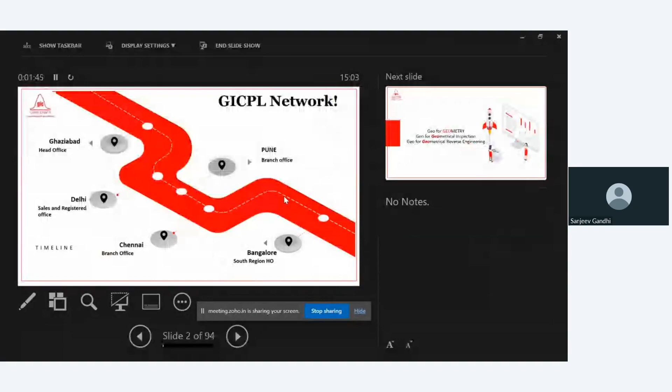As far as our company is concerned, some of you know us very well. We are a GIC India-based company, and the name Geo we have taken directly. We do a lot of stuff with inspection, a lot of things with reverse engineering, and our company is almost now 22 years old. And of course, I'm one of the directors of the company, and we are having now 1995 people serving various product lines.

The most important slide I just want to show you here, and then I will pass on to Alex. When we say Geoinformatics can do measurement, are we able to do the measurements? Unfortunately, no. We are companies which are very, very domain specific, and they help build the solution for our customers. All these names and the domains you are seeing, whether it's a camera-based system, a laser tracker, or a vision system, these are all our strength.

Sorry? Yeah, we cannot hear you clearly. Okay, anyway, I am passing this over to you. Today, we are focusing on Altimet France, which is the surface metrology company. So this is all from my side. I want to invite you to record the screen, and let us start talking about the real subject, which is surface metrology.

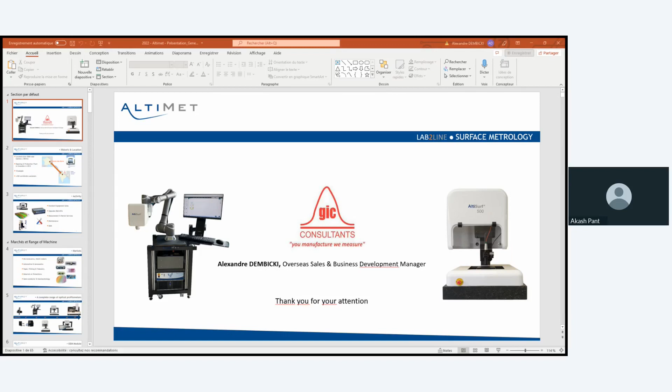How can we answer the needs for surface measurement? It's with a complete range of optical profilometers. As you can see on the slide, there is... Yeah, Alex, I would like to stop you for a second. Are you moving any slides? Because on my screen, I can't see any moving slides. Oh, yeah. And now it's moving, now it's moving.

Which slide are you on now?

You see my screen? Yeah, I can see your screen. And now, do you see all the different machines? Yeah, I can see that. Now it's perfectly moving fine. Okay, so sorry about that.

To answer the needs of the different markets, we have created a wide range of optical profilometers. We can start with a small size OEM module that we can implement into the production lines. The thing is, we use the exact same technology, only the size changes.

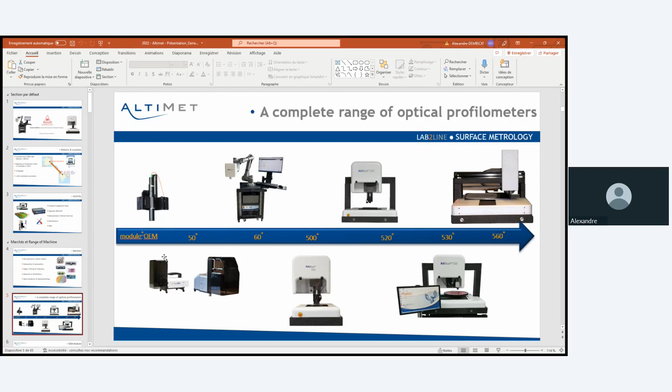So we go from very small to hand portable machines, to machines that we can put inside a cobot or a robot, and then you've got stand-up machines like the 500, 520, 530, 560. The only difference between those machines is the size of measurement of the sample. When it's really small, you can use either a small or a big machine to put many parts on it. Or when you've got really big samples, such as wings of a plane or a car body, you can use the smallest machine implemented into a robot.

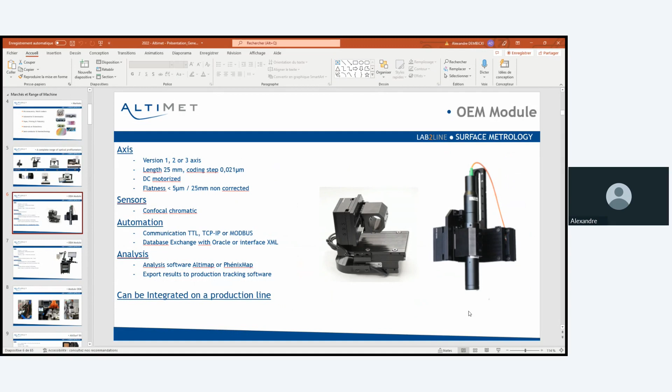So I'll go quickly, but basically you've got 3 axes, X, Y, Z, and we implement our own technology, which is mainly confocal chromatic. We measure the distance between the probe and the surface, and we've got nanometrical Z resolution. That's why we are really precise and accurate on surface measurement, and that's why we are well known in the world. Another example is this smaller machine implementing on a cobot.

Some pictures inside a production line, on a robot, and then on a cobot at different customer sites.

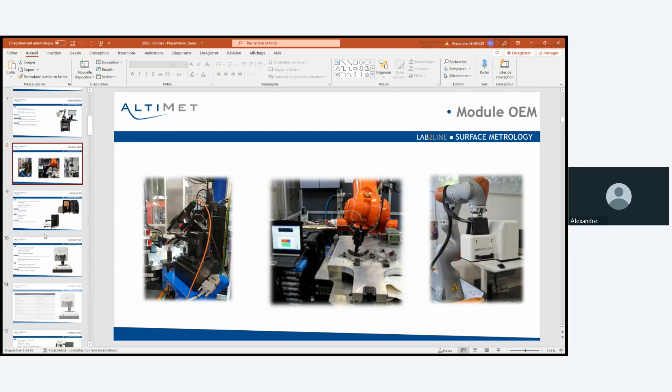Our main equipment is the AltiSurf 500. In 2 weeks, just to mention, we will be delivering this machine. It will be a demo machine for GICPL, and they will have a full range of measurement capability with full sensor, full software, and a camera. So if you've got any samples, you can send them to the team in India, and they can make some measurements.

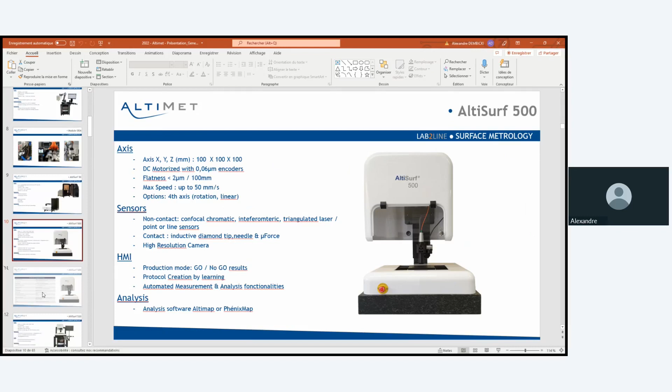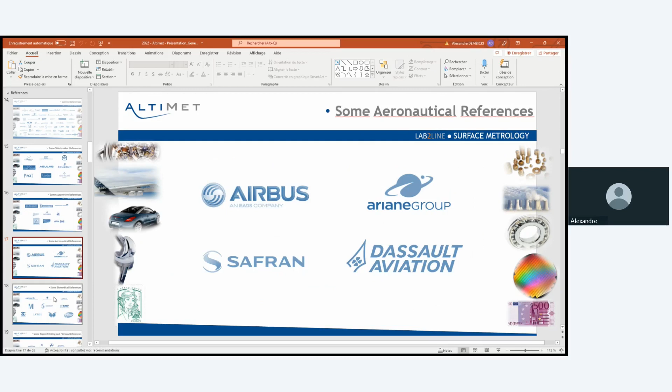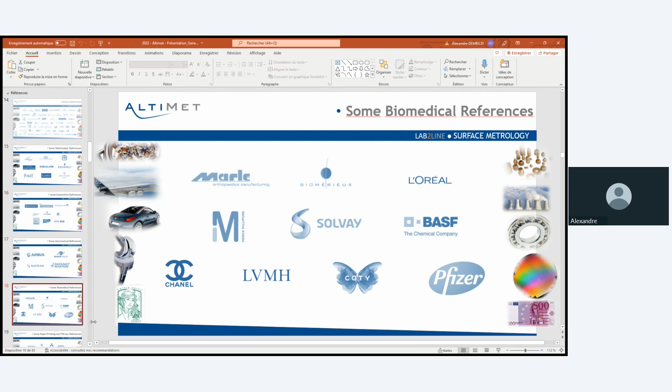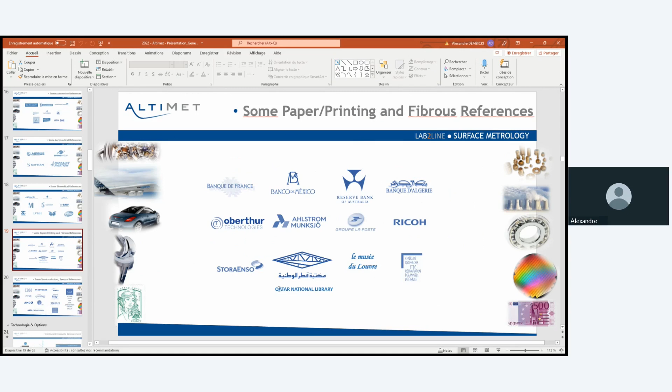In the printing industry, we equip mainly the banks, in order to measure the bills and the varnish on them, the ink, as well as some huge references in museums, like the Qatar National Library or Le Louvre in France.

And finally, for semiconductor, we've got huge implementation mainly in Asia, in Singapore or Malaysia, China, with Fabtronic, UTAC, AMD, Intel.

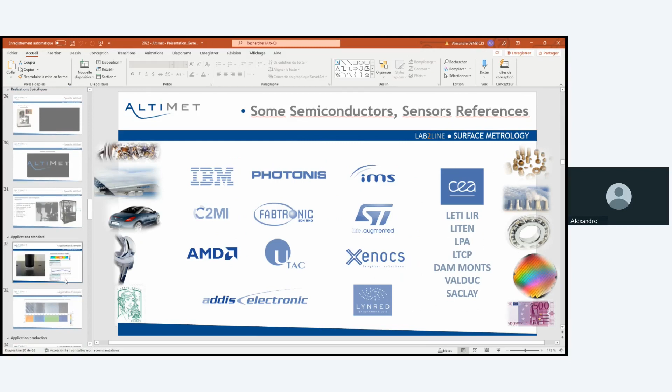So now, what can we really measure? We are most known for roughness measurement. We use the machine and the probe in order to measure different samples.

We do not care about the type of sample because we only need a reflection to be able to do the measurement. Here you can see that we've made many different profiles and we measure the roughness, the RA parameter for the profile, or because of the new ISO 25178 norm for surfaces, we do surface roughness measurement, as you can see here.

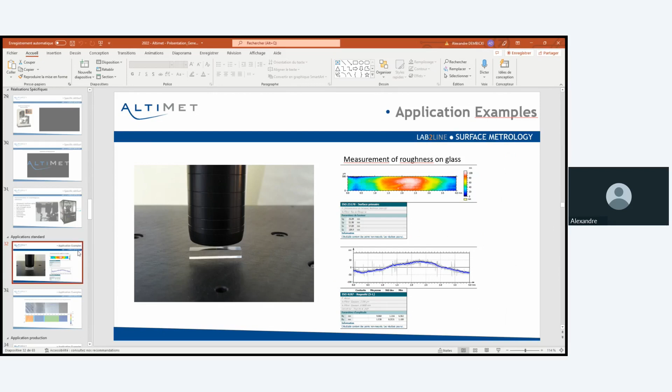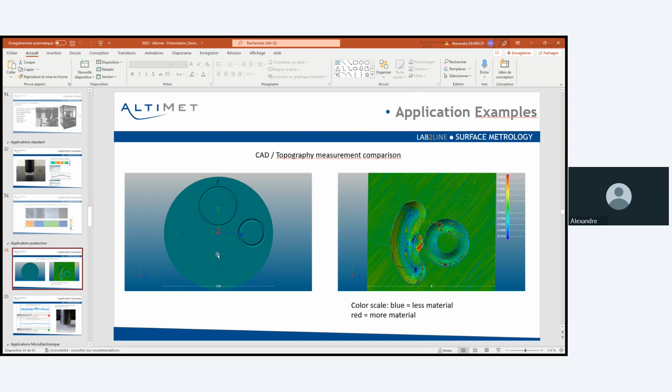So what can Altimet do? Mainly, you've got some CAD and you want to do some comparison. With the Altisurf range of machines, you can perform measurements, and apply it into your CAD to have the deviation of the surface compared to the perfect CAD model.

Then, of course, you want to do some automation. Everything Altimet proposes can be automated, and you can have directly for the operator a red or green light, pass or fail, with an automated report that you can print.

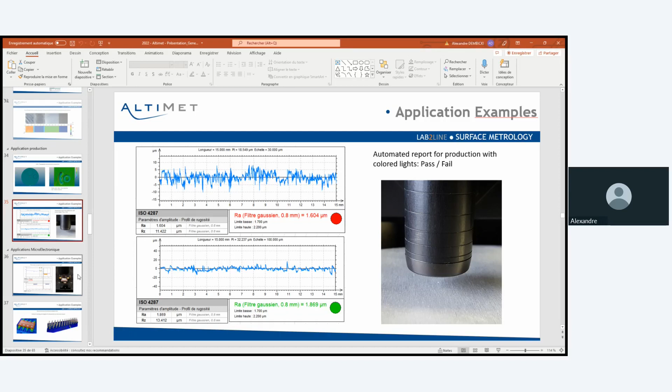Okay, so this is good, but what kind of sample can we measure? We can measure all of them. In microelectronics, we can do electronic component measurements, and for example on this one, this is the bump and the different step heights. You can see we can really go down in nanometrical range or in millimeter range, approximately down to 2 nanometers in Z resolution, up to 25 millimeters.

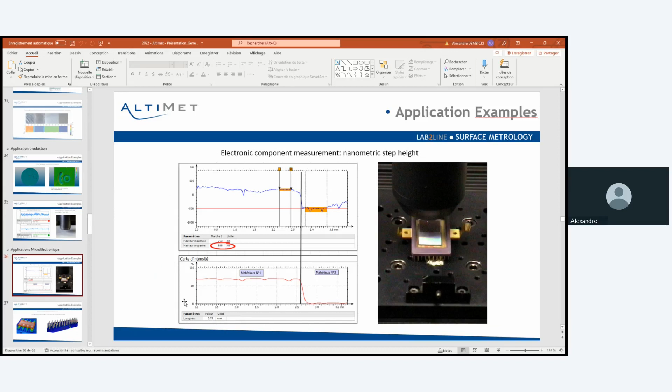It only depends on the probe that we use. For example, on this other electronic component, we can study the welding of the components, the height, and even the roughness on the whole surface.

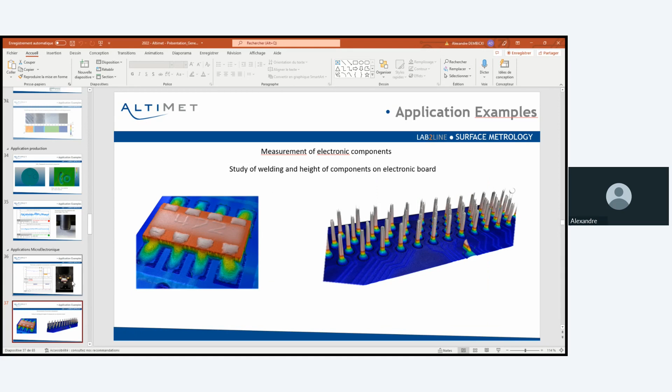For the wafer, you can see that we've got a camera and our own sensor. We've got some options of visualization of the sample that we can rotate. Then we can do some pictures and dimensional measurement of the laser or plasma dicing.

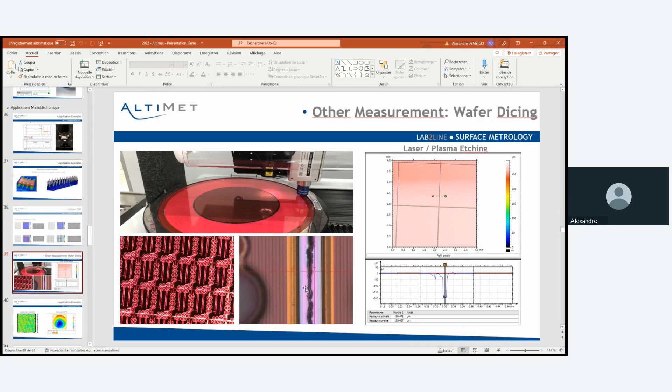So this is just using the edge. And then we can compare it, as shown in the presentation, the width or the altitude of this crack. And we can match it, the measurement, with the picture, or even with the CAD model I mentioned earlier.

So this is another example of diamond disc. This is in order to see if the diamond disc is used or not. Has it some wear? How long can we use it? And we can also do TTV measurements, so thickness measurements.

So there are 2 ways of doing that. Either we use only one probe that does the measurement with a different technology, or we can have also 2 probes measuring upside down.

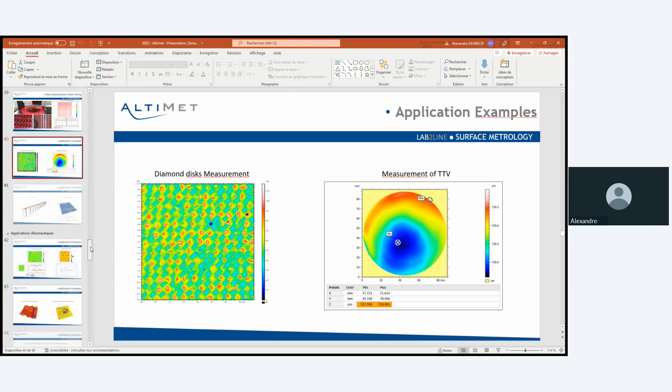For the aeronautical application, mainly we do some crack measurement on turbine blades, for example, so we can really understand what's going on within the material that we use, and also the wear measurement.

Everything that I talk about at the moment is also being applied in automotive or mechanical industry. As seen in the wear measurement, we use a step height measurement for the width, and the height here is around 33 nanometers. So we are really accurate and really precise.

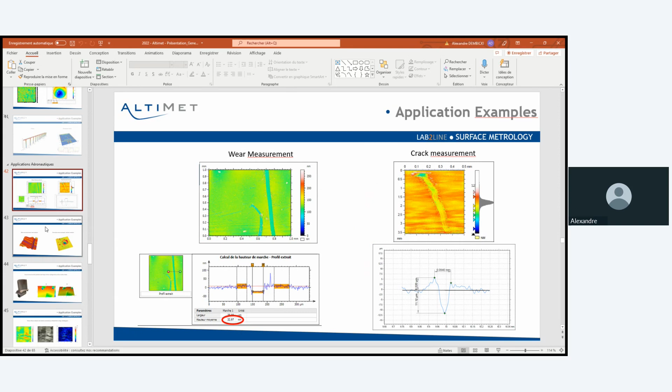Another example of wear measurement, but this time in 3D, and of course a corrosion measurement with a volume analysis.

So how is this hole? What is its diameter, the radius, where is the center, what's the altitude or the depth of the hole? And so with all this knowledge, we can compute the volume, and we can then understand how the corrosion is being made and how it's increasing within the sample.

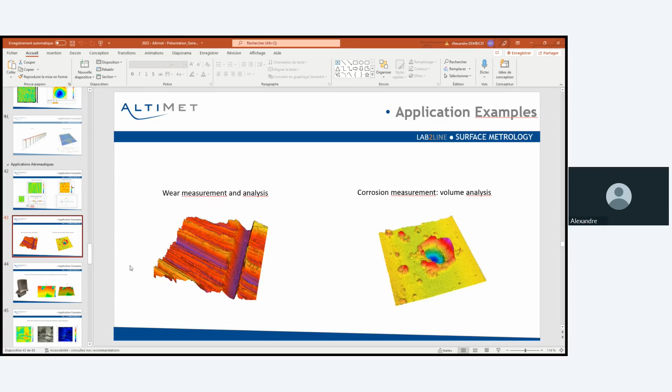Here you've got the measurement in 2D and in 3D. I'm sorry I cannot show you all the different measurements because this is really confidential. My customer could only allow me to show you this slide.

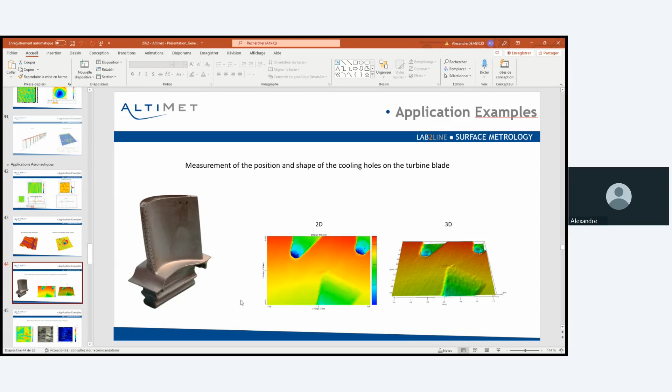Then this is another example on this blade of the failure facies. So you can see different colors depending, so different altitude, and you can see how it behaves within the sample. So this is for the wing or the landing gear.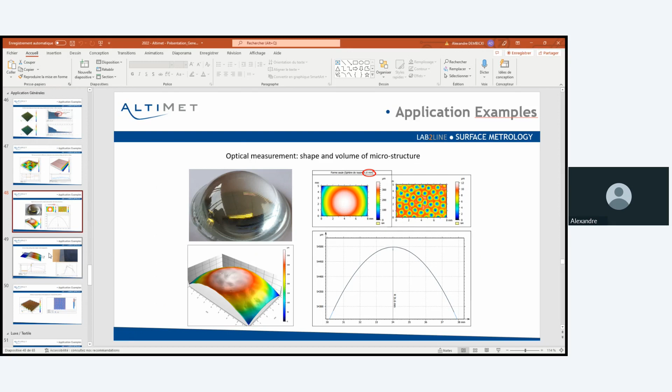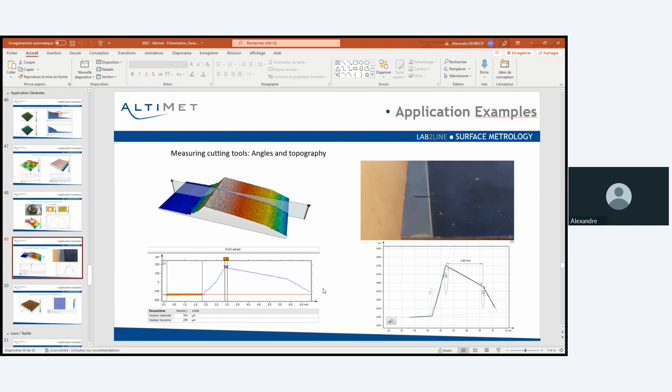So this is for the form and shape. Here, this is a cutting tool in order to understand how long you can use it in the milling machine, like the drill. Can you use it properly? What are the different angles? Will it behave properly on the metal I drilled into?

Volume measurements, once again, everything that I show you here is made automatically. We've got a really powerful software to understand the different volumes, and it can count also the number of holes, let's say the blue holes. And we can also make some statistics behind that we can share into your different programs.

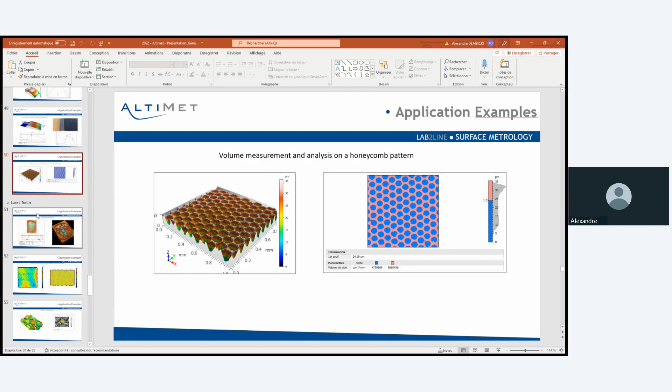This is for luxury and textile. You can have some engraving measurements, always the same, measuring the roughness, measuring the width, the depth of the different engravings.

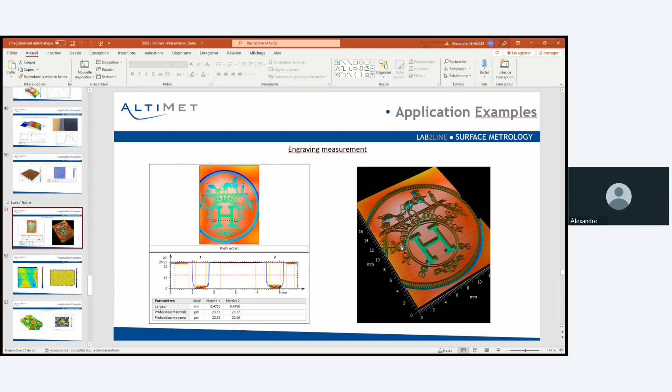We can also do this for automotive, for the inside of the car, using tissue or leather, and you want to compare the differences. So why choose one over the other? You just make one measurement from sample A and sample B, and you can clearly see the differences in topography. With this measurement, you can do lots more analysis like roughness, step height, number of holes, and this gives you the aspect and gloss of your different materials. So it's easier to choose the best one for your needs.

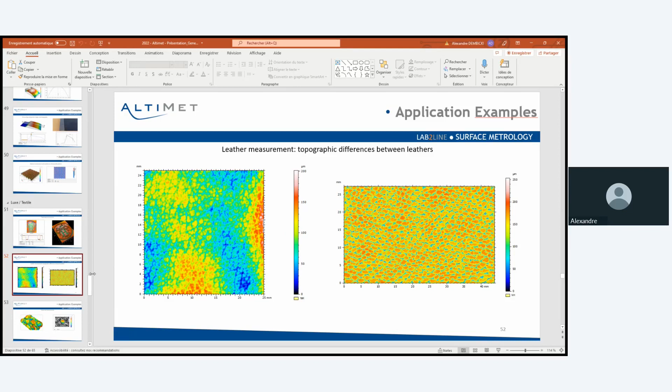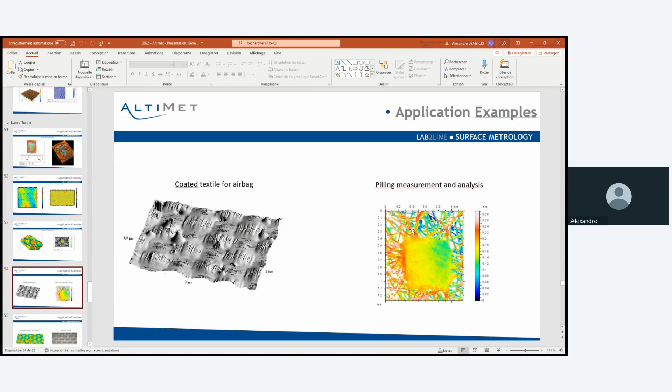We also do some snake skin measurements, coated textile for airbags. Is the airbag going to be good or bad? Will it hurt or harm people when it's used? Is the coating really good on this? Same as pilling measurement and analysis. You can see all the different fibers of the textile, and here there's a huge amount of it, so it's not good for the end user customer.

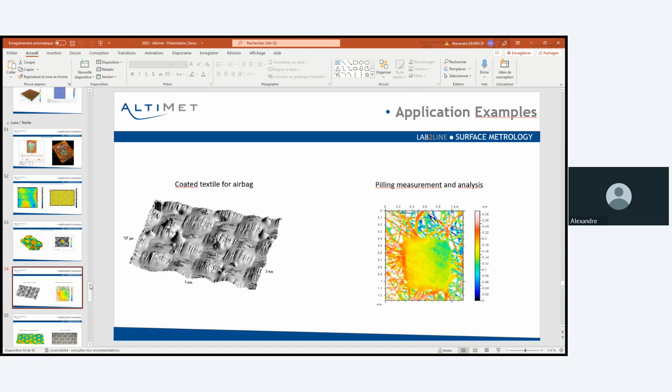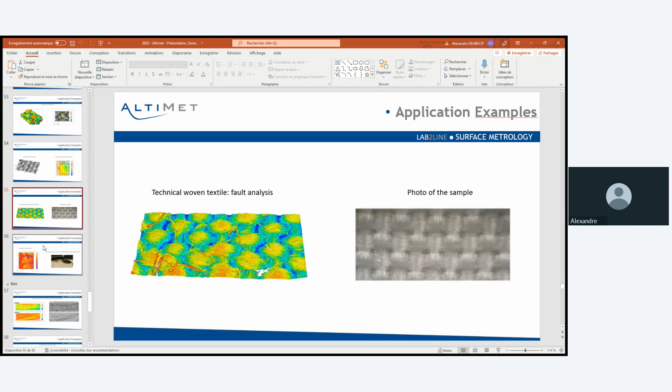A nice other application is paper measurement, and here we've got an example of a 16th century Chinese fibrous paper, as well as a banknote measurement.

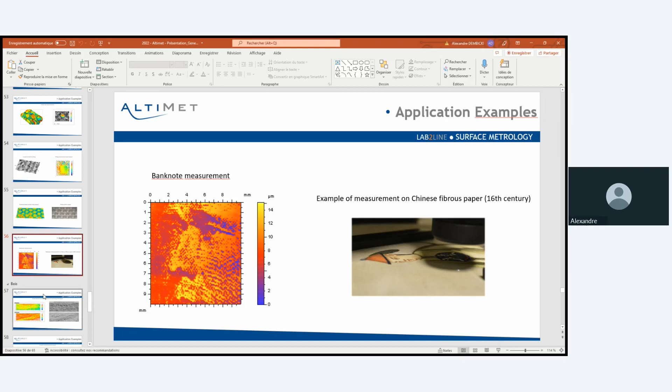Then for wood, because as I said earlier, surfaces cover everything, and we measure surfaces, we can measure everything. We can have an understanding of how the varnish behaves, what its thickness is. Here's an example of water varnish with its picture compared to a solvent varnish. You've got the same scale of measurement, so the comparison is really easy to make, and you can really tell that here you've got some holes or some dust, and you have to decide, is it good or bad, depending on the plans you're trying to make.

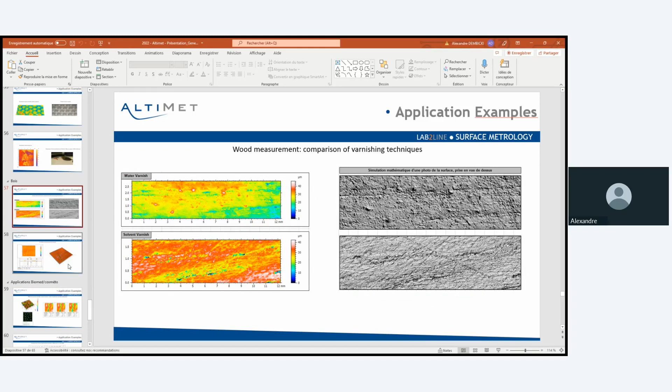Of course, on metal and on wood, you can have some scratch measurement. In this example, it's on wood. Here you've got the step height, number 1, 2. You compare it - is it good enough? Can I clean it? Will it be easy to clean it? How come I've got a scratch here? How can I change the parameters in my production line to not have those kinds of scratches?

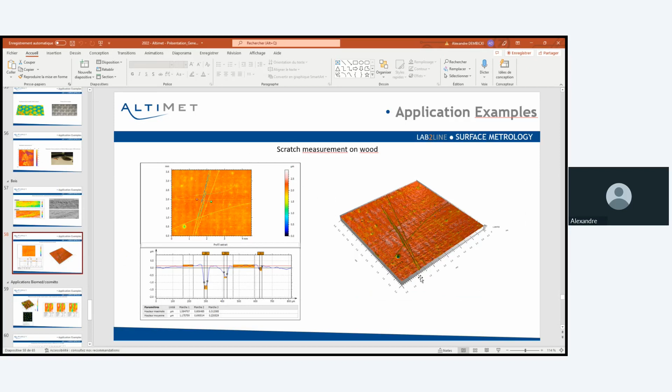Finally, we go into cosmetology. We measure the human skin. You can see all the different wrinkles and veins. You can understand how they are connected to one another.

But mainly, what's more important is that you can apply some anti-wrinkle cream, and you can see over time how it's behaving. So in this one, it was the first measurement, the second one, and the third one - at time 0, then at plus 1 hour and plus 2 hours.

Here you see a deep valley. It shrinkens and it shrinkens again. So that means there's a good effect for the cream, because the valley, the wrinkle, is decreasing. So the altitude between the highest and lowest point is minimal. The depth was 235 micrometers, and it goes to 110 micrometers, so 110.

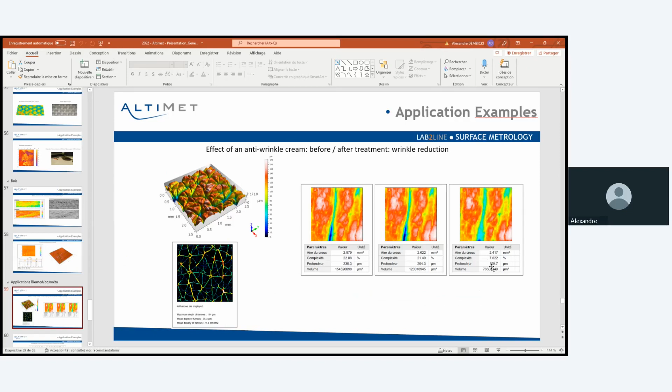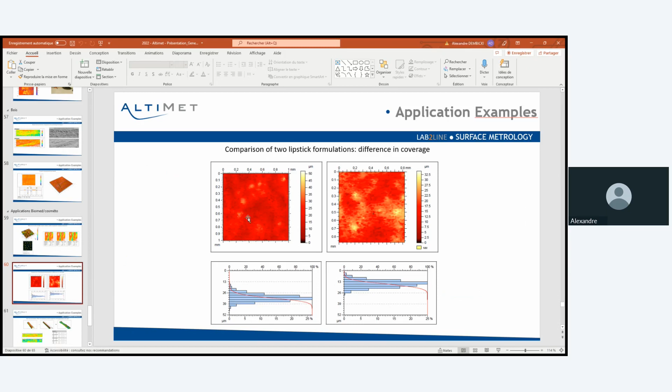For the lipstick, what is the difference in coverage? The lipstick is exactly the same as varnish. Can you tell the difference in the coverage? What's the behavior? Is it really homogeneous or heterogeneous? Everything can be done with the Altisurf machines.

An example here of hair measurement for the effect of the shampoo. So you've got the hair, and then you clean it again. So you've got the differences between not clean and clean. The effect of the shampoo is to clean this amount of material. But is it good? Is it bad? Once again, you've got to have some roughness parameters in order to do the comparison between clean and not clean hair.

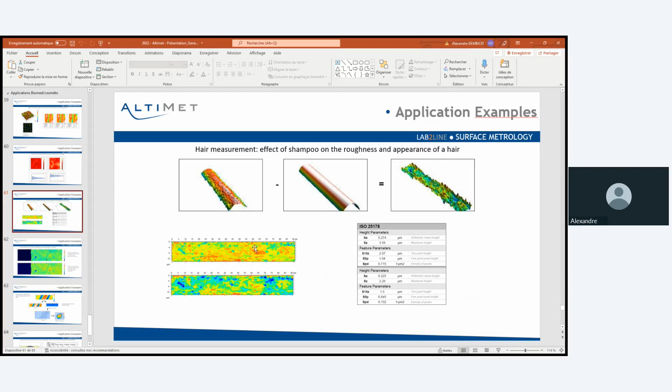On this example, we've got cream thickness measurement, so there's a difference in homogeneity of the coverage. This is mainly to do measurement of sunscreen. If you apply sunscreen, will you get burned or not? Is the coverage good enough for you? On the top, you can see there's good homogeneity because the valleys and peaks are all covered, so you've got good protection against the sun. But at the bottom, you see poor homogeneity - you see mainly different colors, mainly yellow and green. Rather on this one, it's more bluish.

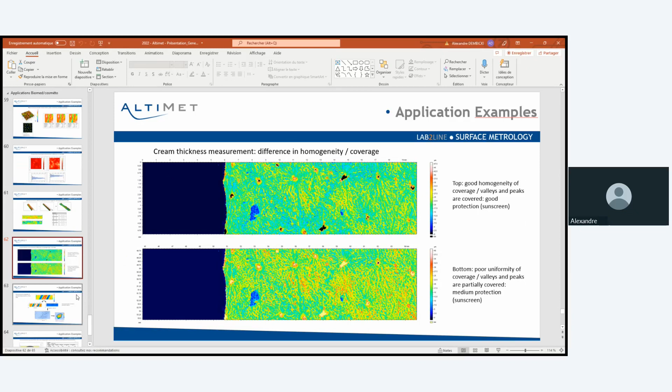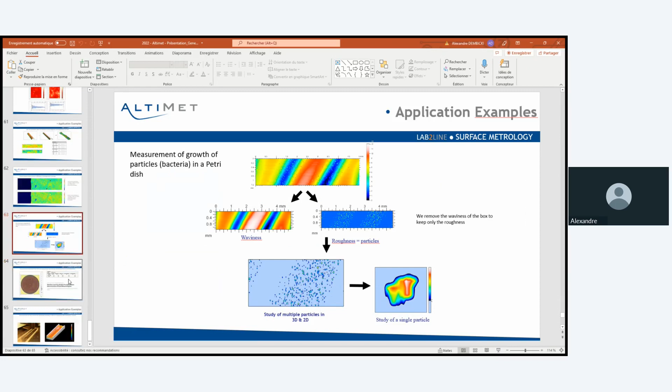We can also do some growth particle implementation in a Petri dish, just bacteria measurement. We can also measure some blood, and the viscosity of the blood has a relation to the roughness, so that's why we do it.

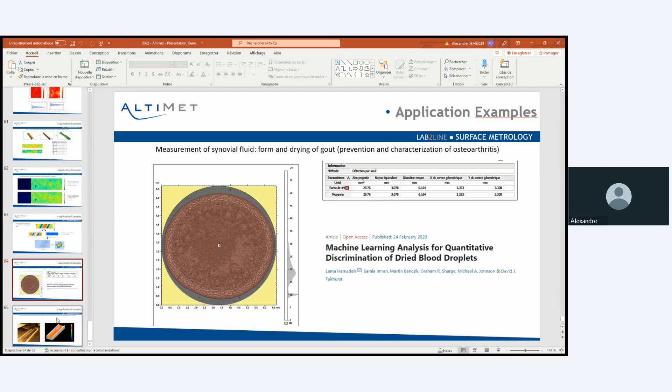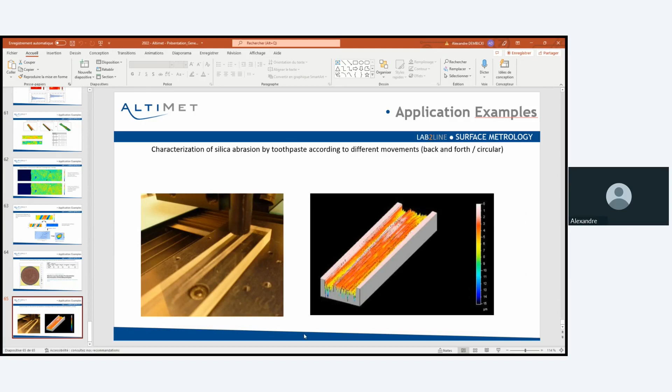So I've finished now with the presentation, and I really want you to show some measurements. So I will share my screen again.

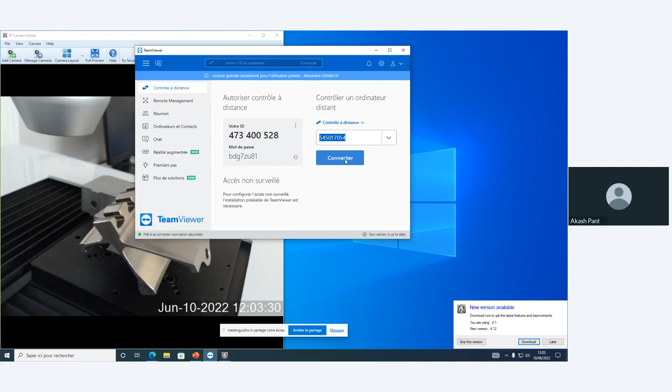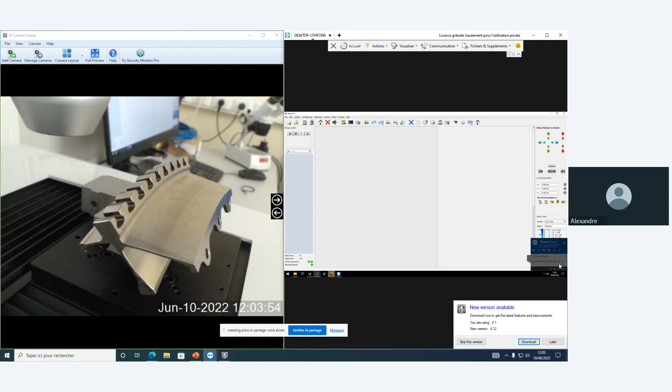So now I've got different machines, but as you can see, I can take control of the machines directly from the measurements. On the right side you've got our software, and on the left side you've got the machines. We've got different machines, such as this one, which is the AltiSurf 500.

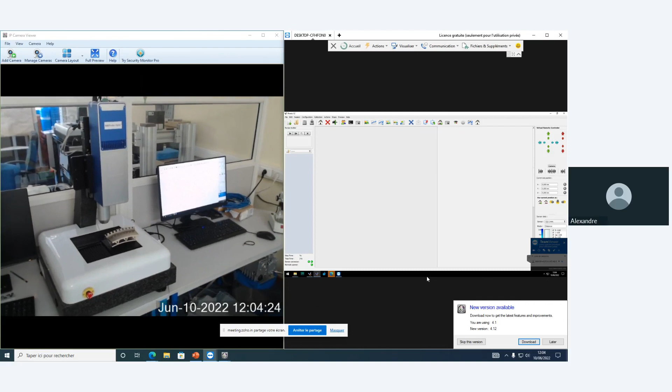The production and the testing. And here, this is the machine I want to show you. I've prepared a sample which is a gear for the helicopters. And now here you've got also a very small machine, hand portable.

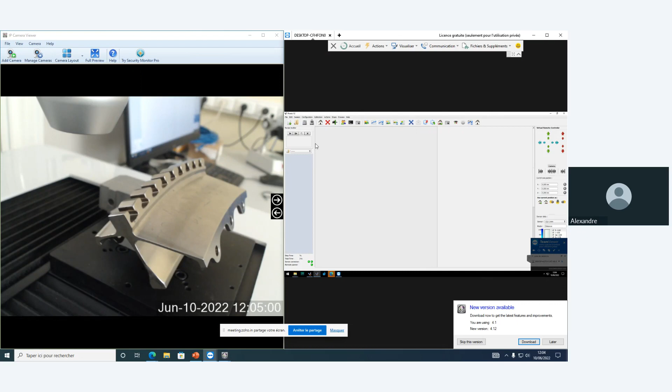So you just need to apply or to put the sample on the stage. And with the Phoenix acquisition system, which is really easy to use, you can save some measurement protocol. So here I've made some tests. You've got different levels of users, and in the protocol you can really follow everything.

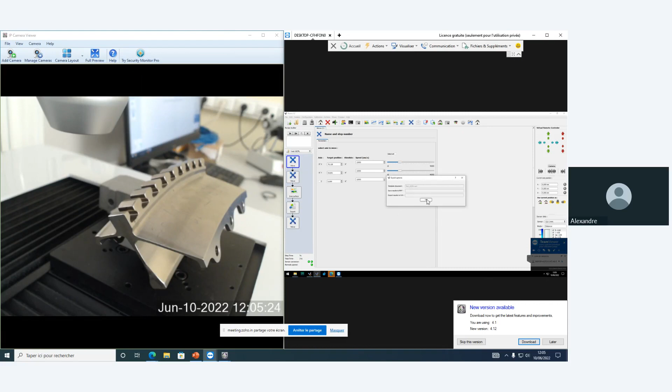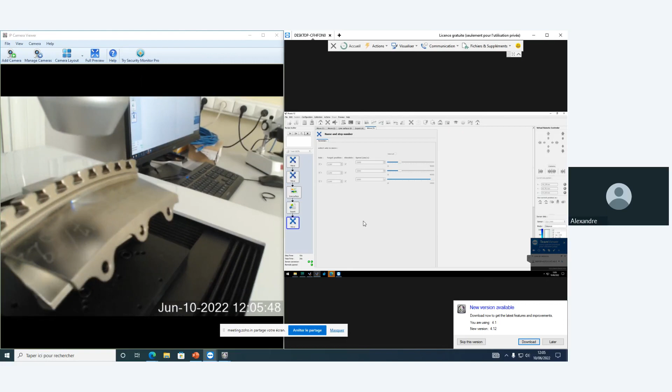So I will just now launch it. You tap the name of the operator. So now it's moving. You will see some of the light of the sensor is applied, and we measure this line entirely. So it goes to the parking position.

And now it's finished. As you can see, automatically, here, I haven't touched anything, and you've got the report. So what have we measured? We've measured inside here the gear measurement, and it has some huge scratches, so it means it's been worn. The customer wants to understand the different wear, so we've got the 3D view.

Now we can go down into the analysis in 2D, and we've got the step height, so we've got the understanding of the altitude or the depth of the scratch. I've implemented the tolerances - is it good or is it bad? Everything can be really set up with different limits. It's really easy to use.

Okay, so now this was a clear example. And what is good with the software is that you can manually change everything. So I move the profile, and you see automatically it switches itself. And now you see the scratch is not good enough.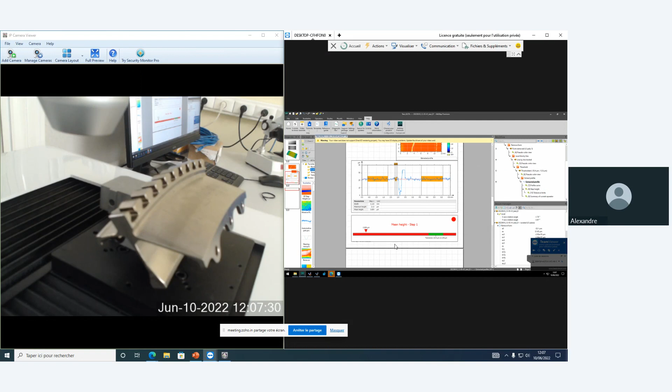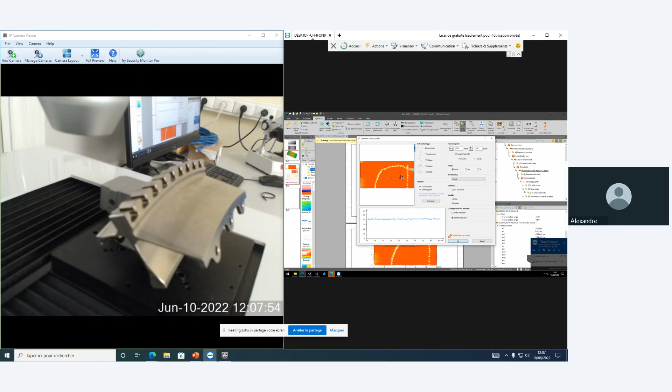For the roughness measurement, it's quite the same thing. You just have to click some operators. I've got many different things, but you've got a training offered with the machine. We can extract a profile - let's say on this area. I click OK.

And I go into the studies, and I've got parameter table. I click OK. And now you've got the roughness parameters.

So you have to understand that Altimet is a partner of the ISO norm. So all the latest norms for the roughness, profile or surface, have been implemented in our software, because we've got 4 development engineers that are in the norm, and they set up with different customers in order to set up the different algorithms. That's why as soon as a new norm comes in, you've got an update, a free update of the software to implement your measurement.

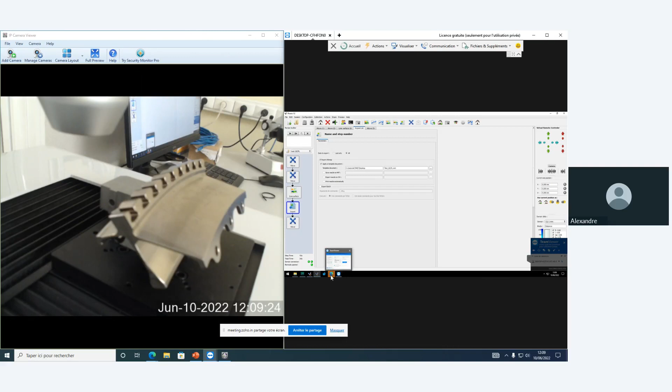So here you've got different things on the software, and the main thing is that you can move, so place different samples. You can do one measurement, and you can export it automatically. There are some other examples, but it's really easy to use, and you don't have to have too much understanding in order to make those kinds of measurements and analysis.

I hope this was good for you. If you've got any questions, feel free to ask, and I will answer them now.

Okay, that was great, Alex. So I have a few questions. I'll just take them. I have one question from Mr. Rizvi. He's asking, what is the least count of the machine delivered to India?

We have no machine delivered in India right now, and the first one will be for GSEPL, the demo machine, so probably in early July. But what I can show you is the list of our different academic customers.

Okay, so I have another question from Mr. Rizvi only. He's asking, how can we check the surface profile of an optical lens?

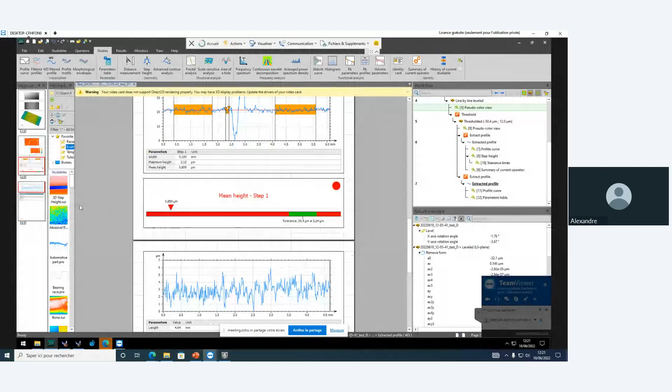On the analysis, let me share my screen again. I'll make it bigger, I'll just show you. So here I've opened an example of a new surface. I'll show you then in 3D.

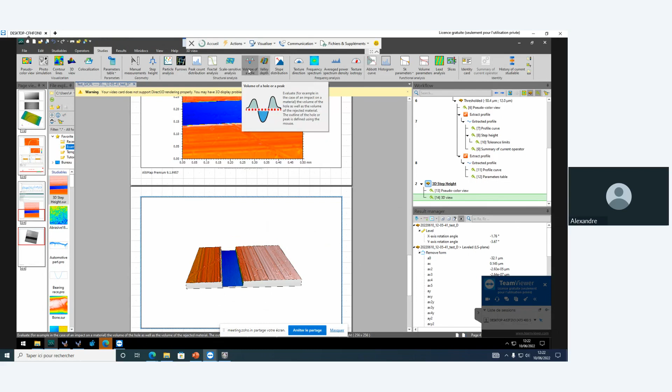So here, let's say you want to have the volume of this. We've got what is called a study, and you've got volume either of a hole or valley depth. So I'll choose this. I can choose different things, vertical lines, square...

And I need to set up the contour. It can decide automatically, but I don't know, usually it's made automatic. I don't know what's going on here. Or I can choose manually.

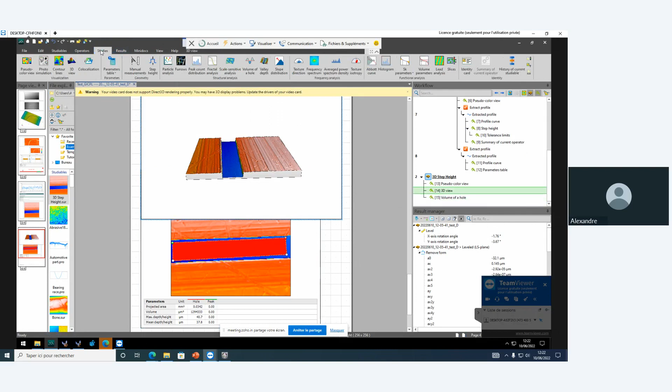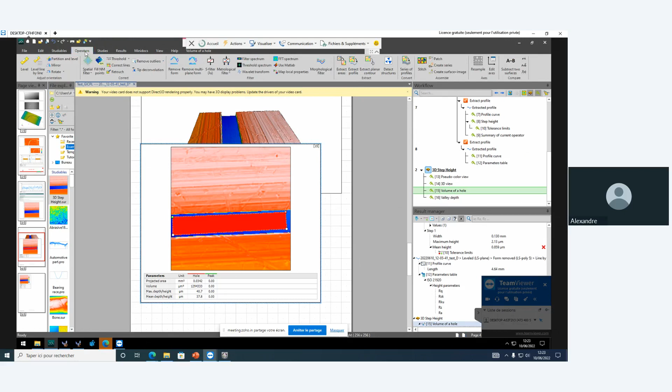So you set up and you've got the valley area and everything from this. But mainly if I go to study, then for the roughness, you go into the studies and you've got what is called parameter table, and you've got all the different norms within the software. You choose the one you prefer.

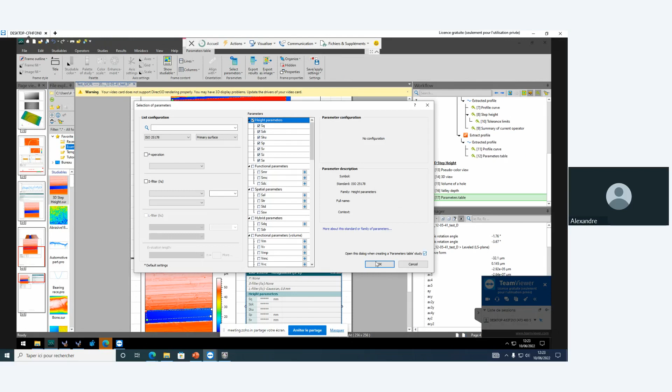So for the surface, this is ISO 25178. You choose roughness, waviness, or even bend path. So I choose roughness, and here I've got the 8 parameters. I click OK, like demo mode, always the same. And here, I've got the roughness.

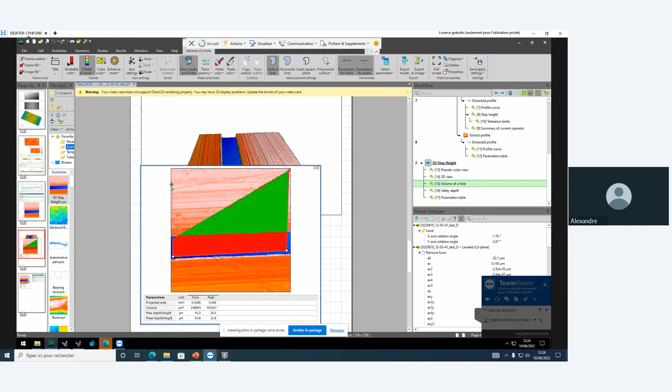But usually for the volume, you've got to set up a huge square. You choose least squares plane, and then it will perfectly fit, and here you've got the holes in red and the peak in green.

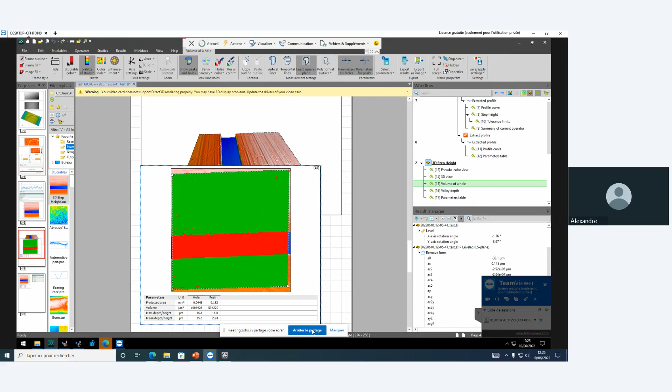So what you have to do is just make the measurement with the machine and then do the analysis, and automatically you can have the different parameters of roughness, volume, or even sphericity here on the bearing.

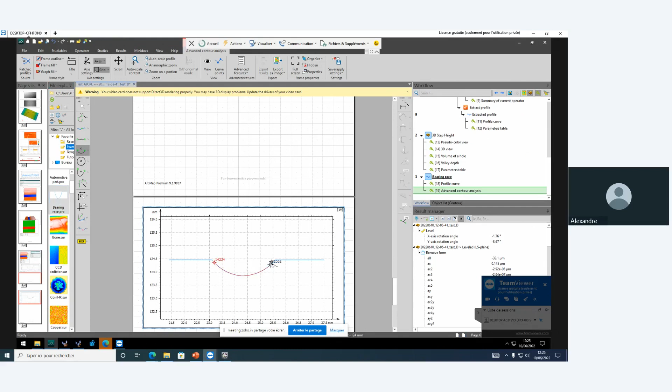Is it a good answer? I hope Mr. Govinda got his answer. So I have one last question from Mr. Rizvi only, he is asking how is it different from tactile measurement?

So we are mainly known for roughness measurement. The range of tactile measurement for us goes from the nanometer range to approximately 2.5 millimeters. We do contour for small parts, but for contour there is specific equipment that Altimet does not provide. The difference is the length of the arm and also the resolution for the contour. So basically contour is a different machine, because Altimet mainly does surface measurement, which is mainly topography, so for step height and roughness.

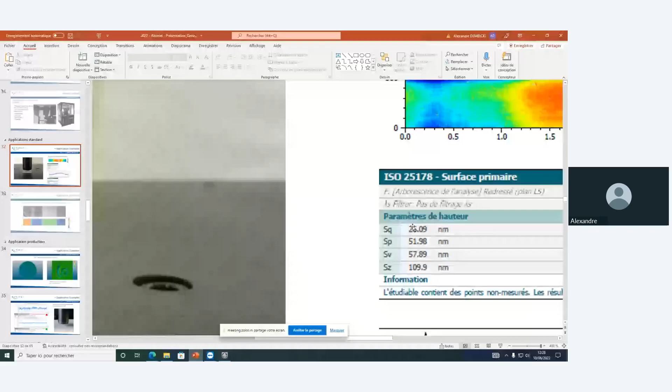If I zoom in here, so it was a really low roughness measurement of 1.5, and you can see that we've got a really low standard deviation. So mainly the repeatability will be in percentage of the range of measurement, and it is about 0.001% of the range of measurement. So we've got a standard deviation always in angstrom.

For this, I will refer you to the sales team of JPSL, and I will give them all the different data sheets of our machines that you can see here.